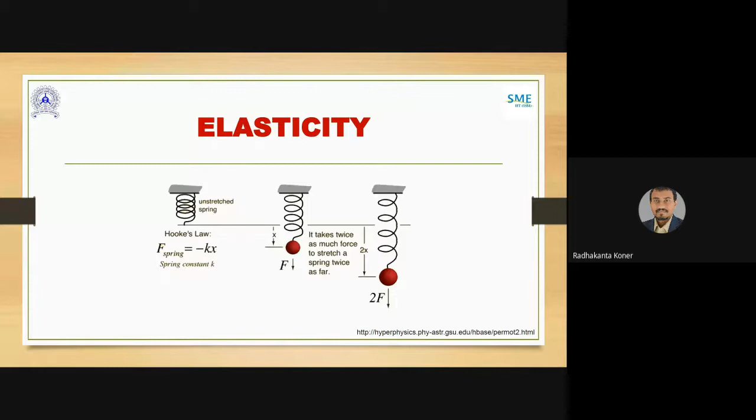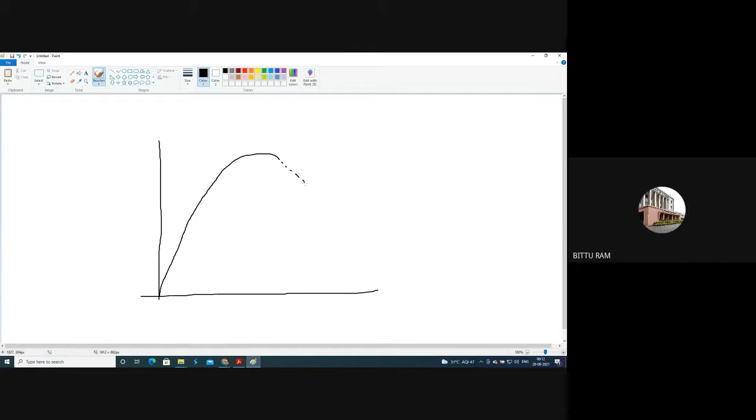Is my pen screen visible? Yes sir. So this is the stress, this is the strain. This is a very famous curve.

Now, people say that up to this portion, the material is increasing. The stress is taken up with an increasing capacity, and there is a gradient, a curved nature, and finally it reaches the yield point. This is the yield point.

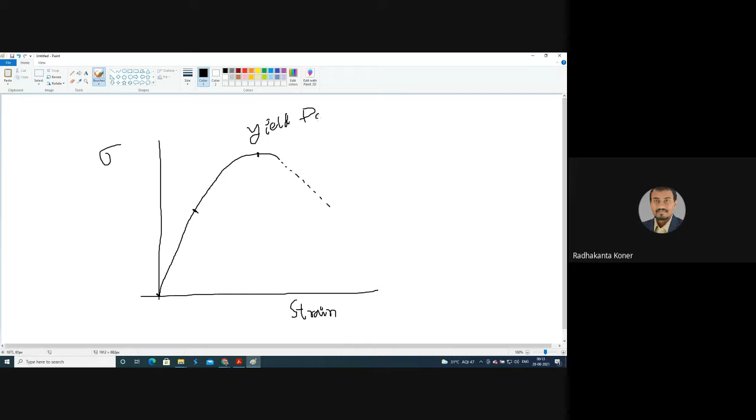Now the interesting thing about this graph is that every mechanical object or material, on average, exhibits this kind of characteristic under an external loading condition. This is now known to all engineers and scientists: any material, when I apply stress, will exhibit this kind of characteristic. After some point of time, after the yielding point, I have marked this dedicated dotted line, which represents a failure.

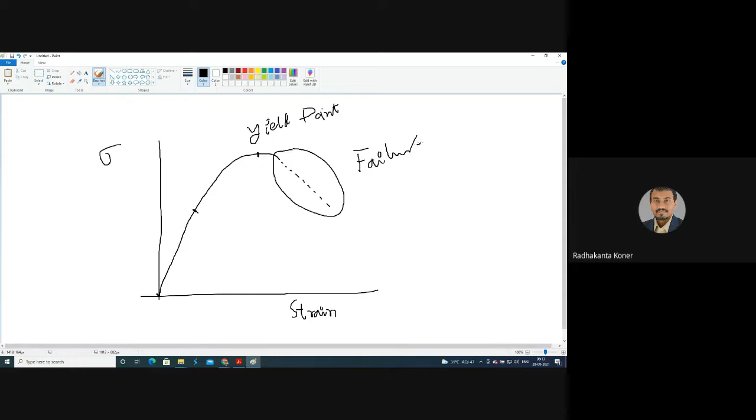So this failure means the material will not revert back to its original position once the load is removed.

Not only that, due to this failure, a lot of energies are released and so on, but that consideration we are not going to consider now.

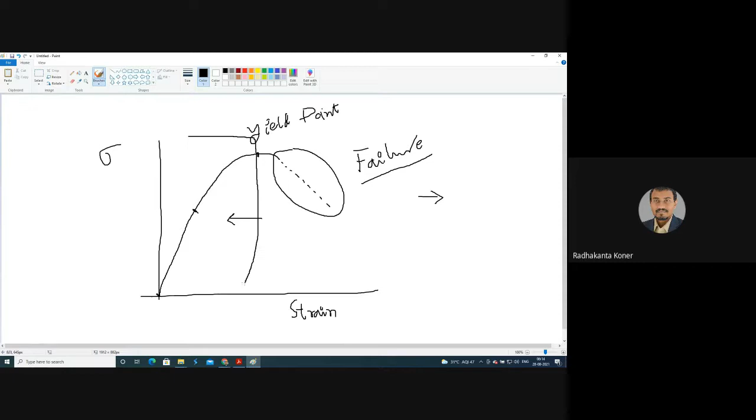As an engineer, I know this much amount of load can be taken by a material. So if I design any kind of structure, maybe a bridge, an embankment, a slope, an underground opening, or a pillar, whatever we design in mining or any geotechnical field, engineers have to respect this particular characteristic curve of that material.

So now one guideline is there for the engineer: if I remain within this range, there is less susceptibility that my structure will collapse.

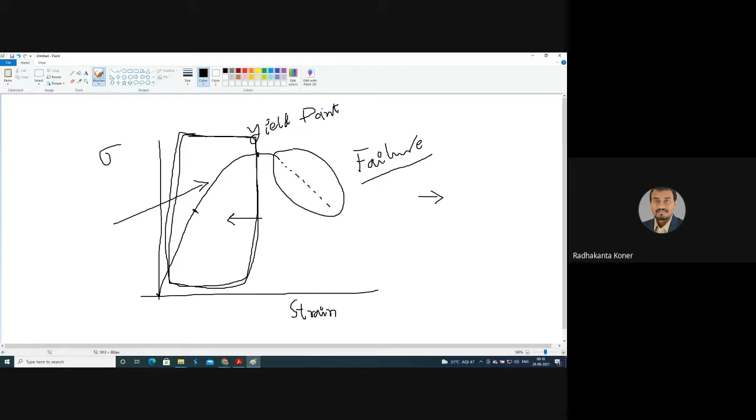So considering and respecting this particular curve, engineers always try to design structures considering the elasticity. So my original discussion was the elasticity, which is a very important part and parcel for our engineering consideration.

Now, one more observation: when you are stretching a spring, it is also a material that has elasticity. When we are stretching a spring, it basically stores potential energy.

There are a lot of physics equations that you already know from cracking the joint entrance examination, so I am not going into those details. But the observation is, now the material is deforming, the spring is being expanded. Expanded means it is deformed, and when it is deformed, in engineering terms we call it strain.

Now, due to the strain, we notice that it is storing elastic potential energy. If this energy is very high, meaning a huge amount of strain occurs, then the dotted line I have shown will manifest, meaning it will break. So if an underground structure like a pillar breaks, it basically means it was trying to store strain energy, but after reaching the yield point, it breaks down.

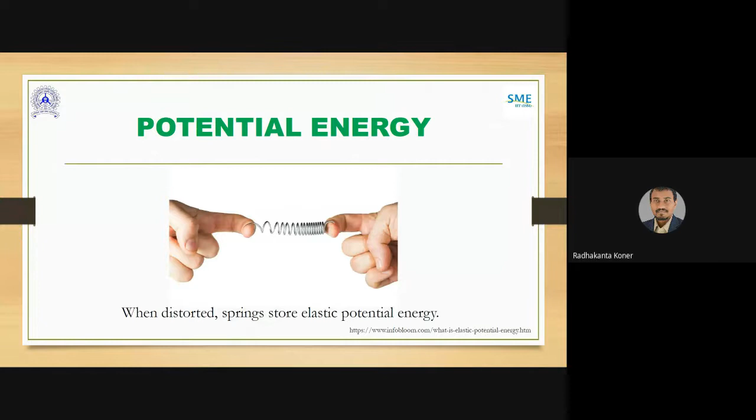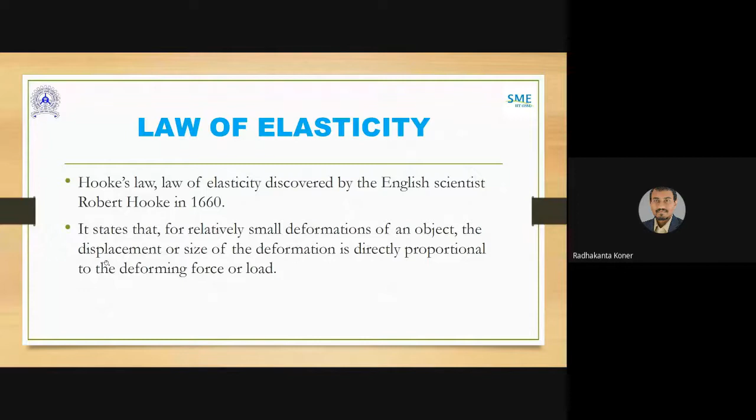So as I already gave the introduction, Hooke is the scientist who discovered this particular law, and he noticed that deformation is directly related to external load, and there is a small deformation that is within the elastic limit. He also noticed that it will return to the original shape once the load is removed. This is a very fundamental contribution to the treasure house of engineering. All engineering structure foundations lie on this principle, which we are always using everywhere, and Hooke also tried to manifest this.

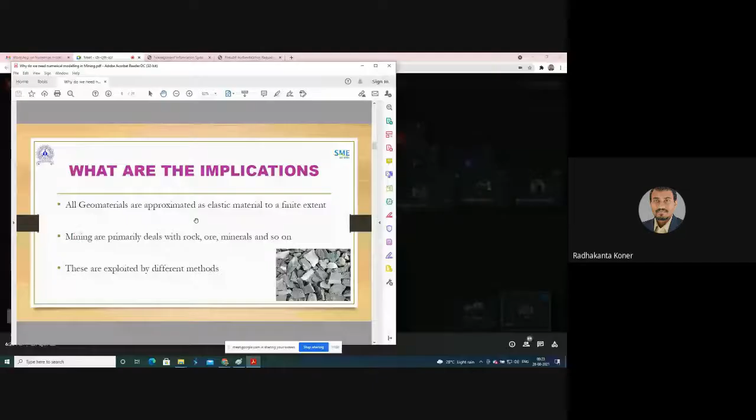Hello Sumit, so how much have I covered? Potential energy, okay, application of elasticity, sir. Application of elasticity, okay. So please remind me time to time if I am disconnected, because nowadays there is a problem in the institute network, okay. This screen is visible? Yes sir, yes sir, yes sir.

So what we have now reached is to do mining. In mining we are doing a lot of operations that I will come to in the next slide, but in principle our engagements are with the rock. We are cutting, we are making some structure, we are carrying those materials, and so many things.

And this rock is basically not homogeneous. We also notice that whatever the homogeneity, inhomogeneity, or isotropy of this rock, it also exhibits elastic property up to a certain limit. And based on that, from engineering geology, we subdivide rock into ductile rock, brittle rock, like that, and many more things you will learn in greater detail when you take the course of rock mechanics.

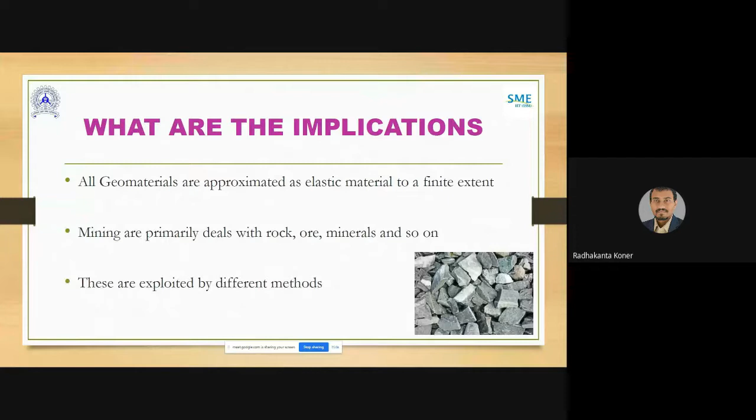So all these mining methods are composed of drilling, blasting, mechanical excavation, transportation of rock, and what I have told you is basically less than what actually is done in the field. There are a lot of things that I am not speaking to you, a lot of things as mining engineers we have to do. So the untold things, unspoken things are lost.

But within this ambit, suppose some of you will really join a blasting company in the coming days. How is the assessment or the performance of the blast explosive being assessed?

Nowadays, throughout the globe, this is done with very well developed, sophisticated software, and based on that performance, people are marketing which kind of explosives should be used in this kind of situation. If it is a situation with a lot of moisture, if there are a lot of cracks, if there are sensitive structures, so many things.

So nowadays, before doing the actual mining, people are widely using numerical methods to simulate before actually doing it in the field. Even for the mechanical excavator, how it is to be designed, what kind of mechanical excavator is to be taken to excavate these kinds of materials, we actually simulate first. And to simulate that, you need some kind of approximation technique, and that approximation technique is the numerical method. So there are so many things.

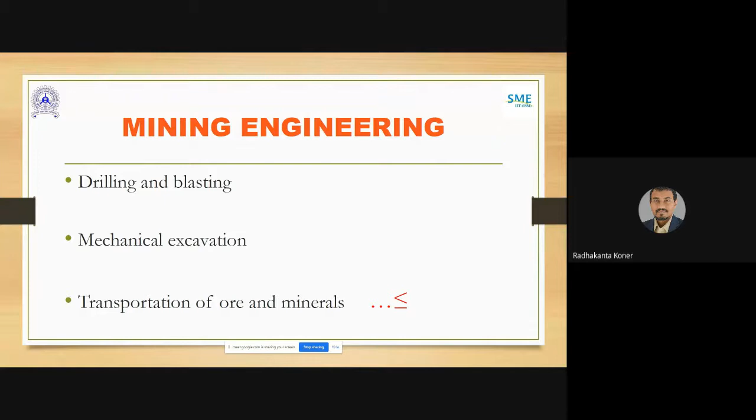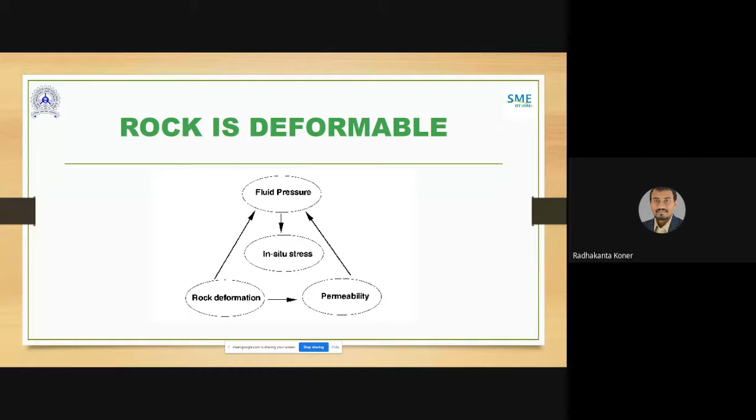Fluid pressure is a very dangerous thing, because in an underground mine, you do not know the exact source of the water table. So suddenly, if you trigger some amount of blast in that situation, there will be inundation, a problem we know from experience in earlier times. So these are complex things, but rock deformation, how it is played through fluid pressure to permeability, all are interrelated.

Now coming to a solution. All mining engineers, when starting to read rock mechanics, are exposed to this equation. What does this equation mean? It tells us that if I am driving an underground tunnel, or in engineering sense, a circular opening underground, and I am assuming that in and around my rock is homogeneous and isotropic, and evenly layered, then for that consideration, sigma r, sigma theta, and tau r-theta can be manipulated using this formula very well.

There is no question about the authenticity and accuracy of this equation. It is a very good answer to the fitting problem. Now, you cannot drive considering homogeneity in and around your environment of a tunnel. You cannot.

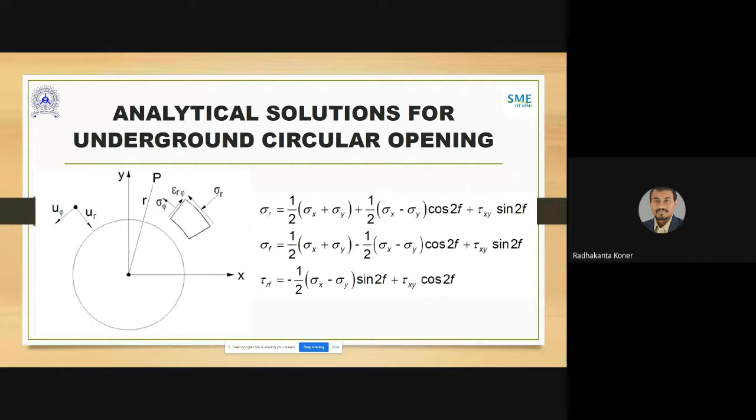People also tried this fringe method. This is a homogeneous sheet, a perfect kind of sheet, earlier there was no perfect sheet. It is a homogeneous transparent sheet, and people tried to give a load from both directions, and we are passing a light through it, trying to take an X-ray of that particular situation, to see how much the intensity of different stress is developed in and around the underground tunnel.

It is not an underground tunnel actually, it is a sheet. On both sides I am giving a load, and how much the fringes are being formed has been nicely shown. This is also meaningful for a homogeneous formation, but our problems are not homogeneous.

So that is why we are trying to find an alternative solution, and that started in the 1960s. Already the numerical methods are more or less 70 years old, and more than that, because the finite difference method was proposed originally more than 200 years ago.

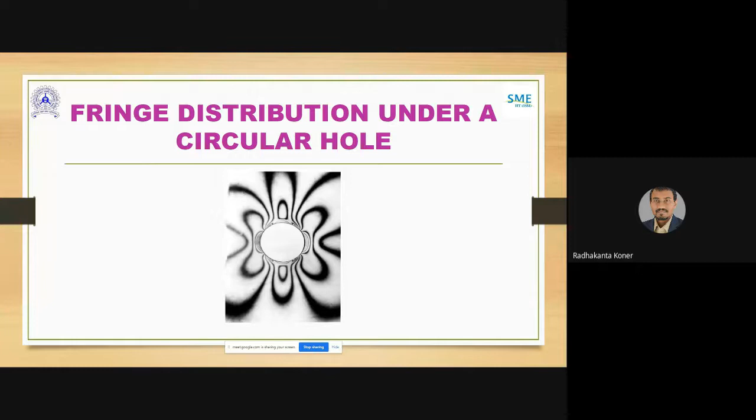The FEM basically started in the 1960s. The FDM, we will just try to initiate the discussion, was originally proposed for solving complex partial differential equations. Later on it has been used in the geomechanical field, and there are a lot of softwares associated with that.

Now coming to a classical rock mechanics problem, formulated by Professor Jing in his paper in the International Journal of Rock Mechanics in 2003. He showed that for a rock mechanics objective there are Method A, Method B, Method C, and Method D available with us. All these methods involve site investigation, some amount of mapping, and after following these methods we have to do some design, based on forward analysis as well as back analysis, and finally construct the structure we are dealing with.

He proposed these four methods are interrelated to each other, but Method A occupies one column, Method B occupies another column, Method C another column, and so on and so forth.

From Method A, it's basically based on previous experience. Experience is a very important matter, and that is why experienced engineers have a lot of value in the field. Following A, using pre-existing standards, there are different standard classifications, different thumb rules in use in mining, and maybe some case studies you are working based on. But it is good to some extent only; it may not be exactly replicable in another site due to inhomogeneity, anisotropy, complexity, heterogeneity, and so on. So Method A is gone, it is no more useful.

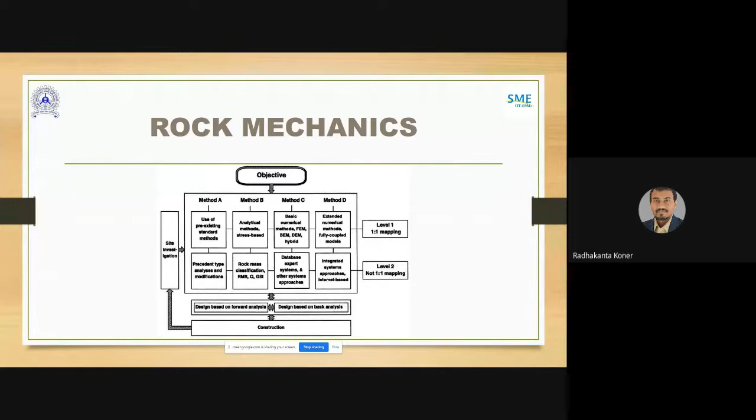That would be very attractive to the engineers. In that sense, it basically encompasses everything, because you are collecting data on a real time, simulating the model in real time, and coming out with a predicted result - what should be the next. You are already getting the data and comparing how much it is matching. If it is not matching in a quite right way, you will revert back to the original modeling and fine tune your parameters so that your prediction and the coming out result will match in exact nature.

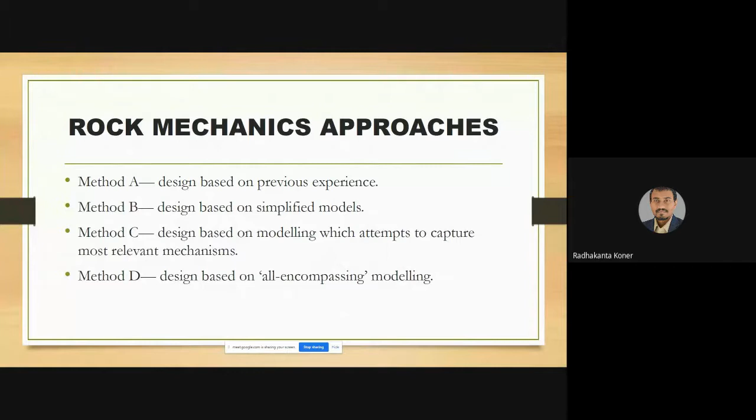So in that way, method D is a very good one, and that will remain good in the coming days also. I am very much thankful to Professor Jing, who proposed that method D is basically the all-encompassing one. He was right in that assessment, because at that time there was no IoT development, no development that real-time monitoring is possible, but he predicted well with his knowledge of rock mechanics. So our approach would be: in any engineering structure, method C is good and method D would be better.

Okay, so now if I summarize my discussion - why we need numerical model or numerical method. I am trying to summarize a few parameters in my own words. One is the limitations of the analytical solution. Analytical solutions have a limit. They had a golden age 200 years back - it's good, but now analytical solutions will not be able to give a good solution for our engineering problems. So it's gone. This is one point pushing us in the direction of numerical modeling.

Better modeling - in numerical models, we are basically getting an approximate solution, and that approximate solution has been revisited, tested, and verified too many times, actually matching the real world scenario. So an exact solution is not necessary. Exact solution is given by the analytical solution, but this approximate solution is very good, workable. Not only that, all these manufacturing industries, car manufacturing industries, are heavily relying on this particular modeling because of this approximation solution.

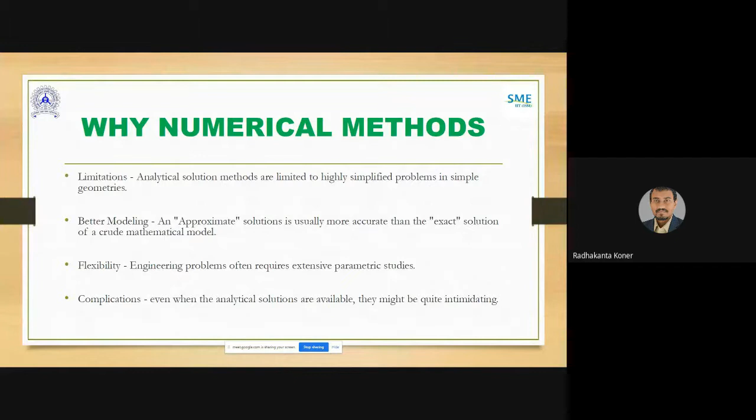But there are big parts that I will now introduce before going to the continuum based model. Remember...

People nowadays often think, okay, I have a numerical model, give us a problem, I will give a solution. But what has been found out? These computers are black boxes - any input you give, if there is no error, some output will come. Whether that output is reasonably within limit, whether it approximates the real time or real environment, you don't know, until you know your solution is quite matching with the real one. For that you need to learn a lot about the theory, about the basics.

It is my request to everybody that, because nowadays you all have laptops, computers, and somehow you have managed to get some software toolbox in your possession - that is not all. You have to learn on which theory these numerical models work, and based on that you are modeling something. And what should be the outcome of that model, beforehand you should know. Only after evaluating your model output can you be pretty sure that your model is correct. So that knowledge is necessary, and that is very much lacking in the present generation.

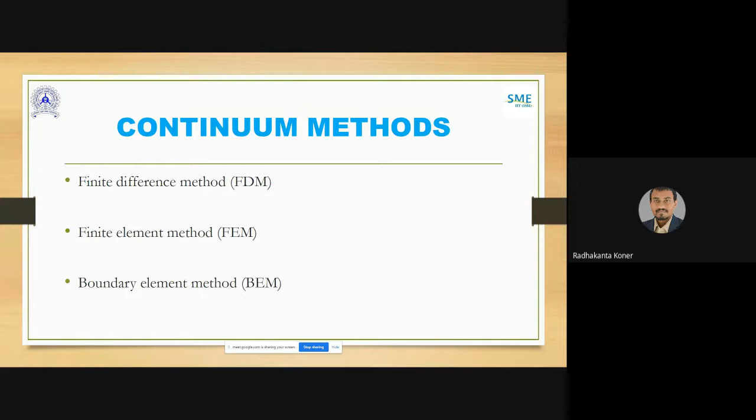So now, before coming into the details of the finite difference method, what I was trying to say is that in any numerical model, all kinds of numerical models, a few things are very rudimentary and you need to know very well. One is the boundary condition.

Boundary condition means - suppose I am sitting here on a chair in front of my computer. So myself, Radhakanta Koner, am an object, suppose, and I have some mass, and with that mass, I am made of biological cells, and there are lots of bones within my body. Suppose somebody wants to do a numerical modeling where I give a thrust force to Radhakanta Koner - so how much deformation will be on the object Radhakanta Koner?

What do you have to consider? You have to consider that I am sitting in the chair, which means I cannot go below this chair because the chair is an elastic, very hard body - with that kind of thrust, the chair is not going to dislodge, so it will remain in place. So I am sitting here, and this sitting portion of the chair basically bounds my deformation in the bottom direction - so my deformation in the bottom direction is fixed. Similarly, my back up to the shoulder is protected by the guard of the chair, so displacement of my body in that direction is also blocked.

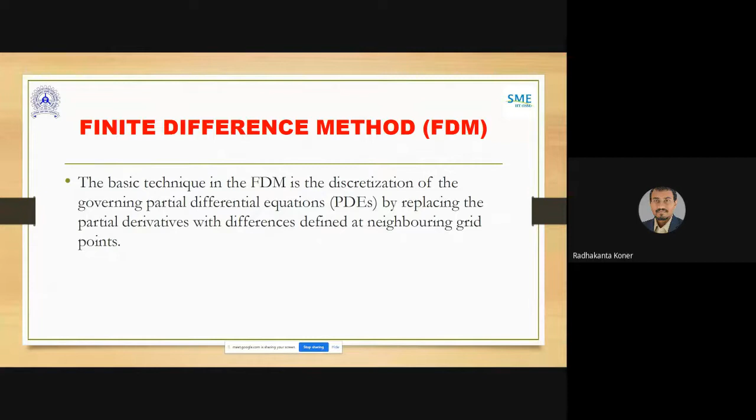So this can be represented like this. Suppose a profile is there and you know the function of the object you are considering, distributed on a finite profile. Now we are trying to discretize that function profile on a path into a finite number of mesh, a finite number of grid. So we try to solve at the x0 point, at x1 point, at x2 point, and so on.

You may have a question that it may not be so smooth a curve — that's correct. It may not be this kind of curve. Maybe after x1 there is some other function possible. So that much complexity can be included in this function, because if I am able to discretize the method, my half work is done. The rest you have to compute using the finite partial differential equation.

There are many methods: explicit method, implicit method, Crank-Nicolson method, so many methods. Basically one approach is forward computation at tn time, another is backward at tn plus 1 time, but all rely on the central difference, like what we learned in class 11-12, how differentiation comes from the limit. There's a nice expression, f(x+h) minus f(x) divided by h, with h tending to 0. That central difference expression is useful everywhere in this finite difference scheme.

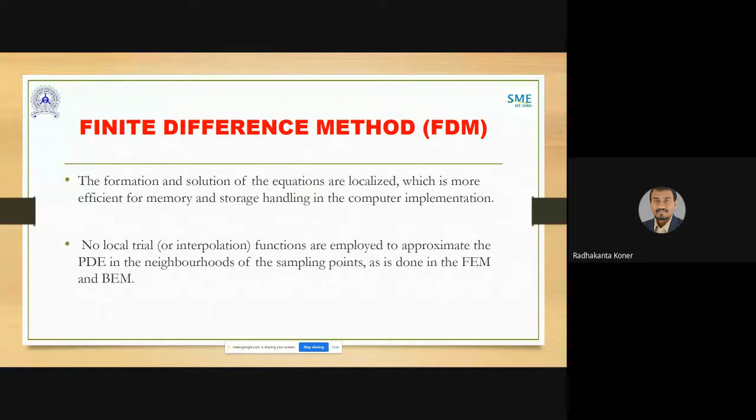But there are problems with the interpolation or near approximation of the problem, because if there is some crack, there is a continuity break. If there is some amount of inhomogeneity within that continuity, there is a break — that particular thing, within this regular grid, you cannot consider with this kind of computational capability.

That is why, for a large strain, homogeneous formation, FDM will work very well. But if there are a lot of stratified deposits with large deformation, it will be very difficult for FLAC to handle that, because computationally it becomes very difficult.

FLAC, or all open-source finite difference methods, have a limitation in considering material heterogeneity in general. So for large deformation in a normal mining structure, FLAC is very good and computationally efficient. But for a large heterogeneous structure composed of fractures and complex boundary conditions, it is very difficult to solve using the finite difference method. So what is the solution? The solution is basically to turn to the finite element method.

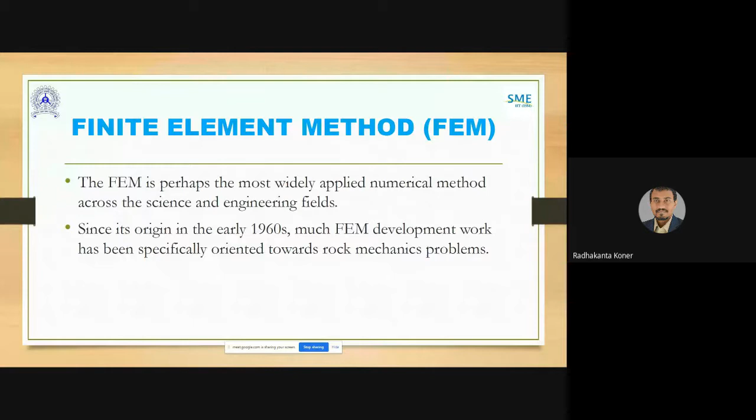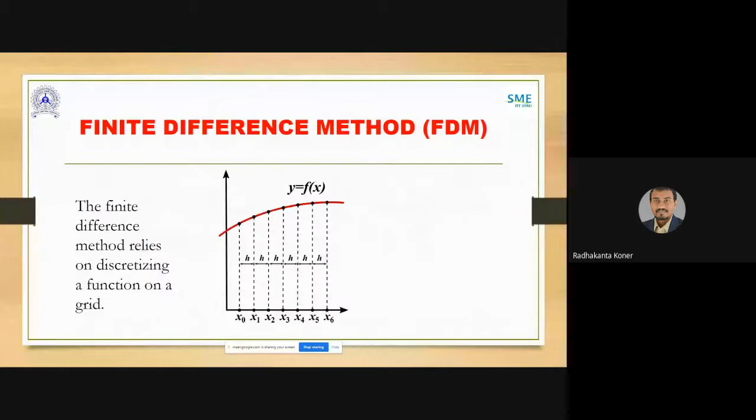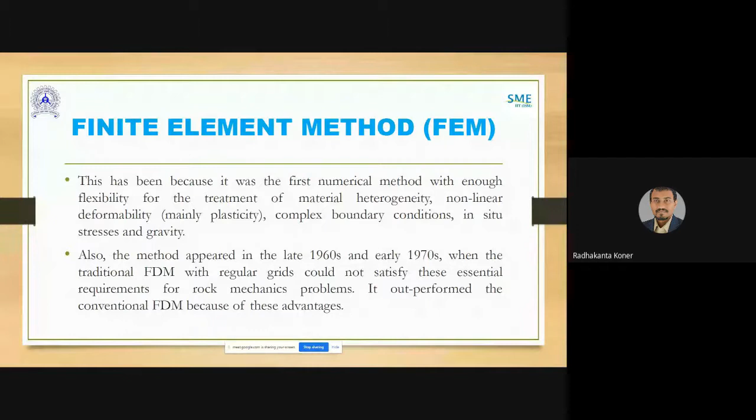Now in this finite element method, what we do - it is not been mentioned, but I will tell you - here, instead of a local state solution, it basically comes with a large stiffness matrix. So for storing that large stiffness matrix, you need very good computational power. Once the stiffness matrix is developed, your half work is done. You can incorporate so many things and your solution is done.

That K earlier, in the spring example, you remember that was a constant, spring constant. Our stiffness matrix is a kind of that matrix, the K matrix. We are trying to develop, trying to come out with a solution, with a repeated solution, in this approach. And that is basically the strongest point of the finite element method.

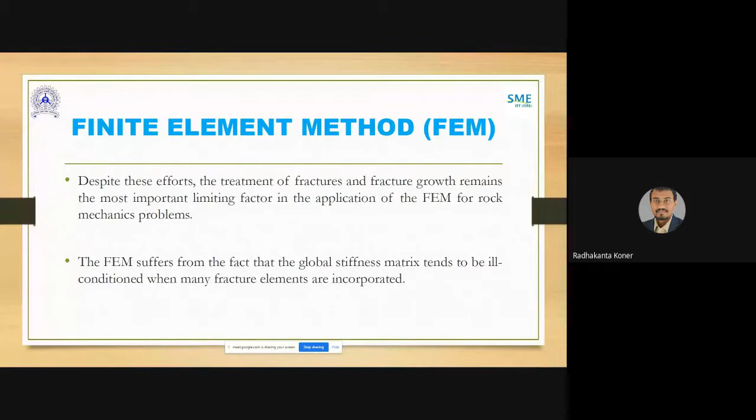People have shown that for a heterogeneous structure, a large complex structure, generating the mesh is a huge task, because there are a lot of errors shown by different software. So later, maybe around 2010 onward, there was development of meshless methods, and these are also very much in use nowadays.

For sensitive structures, FEM is basically approaching in a very robust way to consider all the complexity we are now facing, to model a real geotechnical structure or any structure matter useful in day-to-day life. So in that sense, I can rate FEM as the number one numerical method for dealing with any solid object.

Remember, I have mentioned the solid object - because in my lecture today, I have not considered gaseous material or fluid material and their modeling for engineering problems. We are only considering solid body, rigid body, elastic body.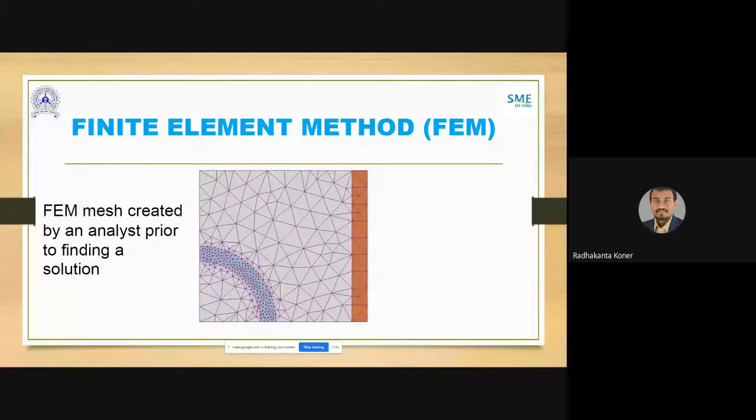So these meshless methods nowadays are in use throughout the globe, and people have come out with a solution to deal with this complex problem of generating a mesh for a large 3D structure. So I think the advancement will be more in the coming days, and there are a lot of things going on that you can use.

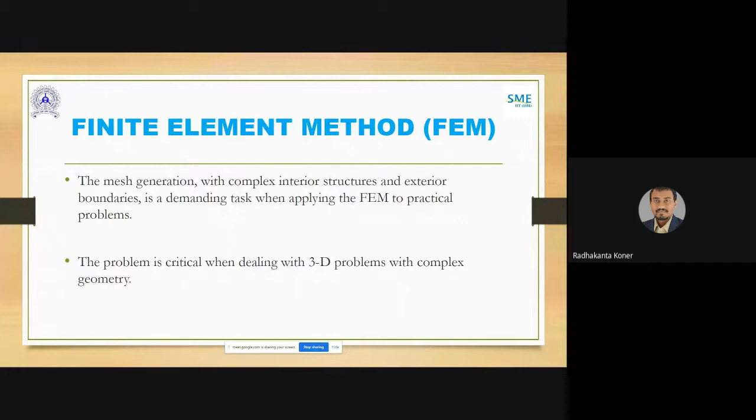ANSYS and Abaqus are very potential candidates in this particular domain for considering the geomechanical behavior of rock, soil, foundation, and interaction of water with soil, interaction of pore water pressure of rock, and crack, discontinuity, joint, fold, like that. So this is very good in that.

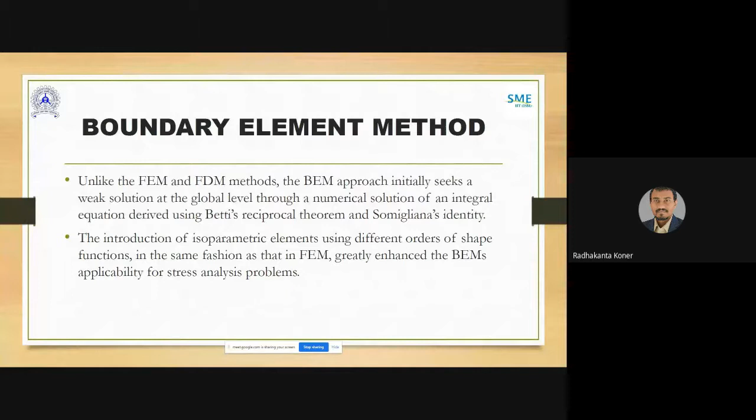I will not discuss in detail, or give much time to the boundary element method, because nowadays it is outdated. Earlier it was used only for mining, excavation, pillar design, like that, and it is no more in use. So we will not discuss it.

Now, apart from finite element method, one of the strongest candidates that I think will sustain in the long run in rock mechanics is basically the distinct element method or discrete element method. In the 1990s - it is only 30 years old - the journey of DEM starts with the Peter Cundall model. Peter Cundall was a rock mechanics engineer. He proposed this method, and from that, there are a lot of companies nowadays dealing with this kind of computational technique, and a lot of toolboxes have already come out that people are using.

The principal focus of this numerical modeling: suppose there is a sand pile, a stack of sand. Now with a ball pen, with a very fine needle, you are monitoring the sand pile. Touch a sand particle, or push some amount of tipping force on a sand particle.

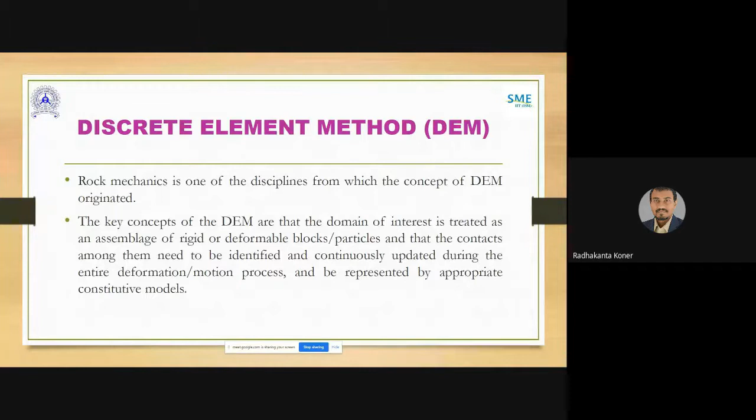But as a rock block, it is actually deformable. So there are limitations in simulating the real behavior of a rock assemblage using a toolbox that considers only the discreteness of the mixture. These are the limitations, and people have tried to sort them out over the years, coming up with new models.

People have tried and come up with a solution, so nowadays the problem of deformability is being solved. When this rock or rock particle interacts with hydraulic or pore water pressure, or any fluid, it forms a membrane kind of structure, and that membrane is continuous and has elastic behavior.

So now we are confident that we can simulate the behavior of an assemblage of rock with fluid interaction, because we have a finite element solution and a DEM solution, and we can predict the particle's behavior. My conclusion for this lecture — though the full conclusion comes later — is that the discrete element method is a very potential candidate in the coming days to interpolate or predict the behavior of a complex rock structure.

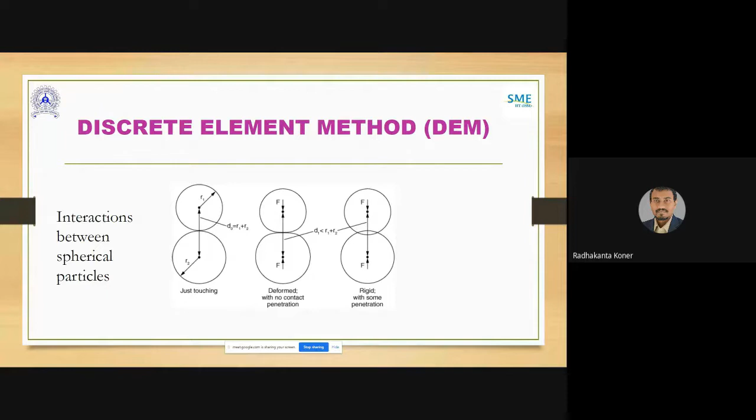There is an important consideration that often comes up while solving a DEM solution: we have to consider an interaction coefficient, which is the normal stiffness and tangential stiffness, or another terminology used in different software. You may ask how to estimate Kn and Kt — it is very difficult, and differs somewhere across other software and toolboxes.

But principally, this is the theoretical basis and foundation of DEM; based on that, it is working. So people are also trying to develop a laboratory scale model, from which they can estimate Kn and Kt.

If I remember correctly, from around 2010 onwards, Imperial College of London, along with a university in Germany, collaborated to develop this kind of lab, trying to simulate conditions not observed in a real world scenario — specifically the interaction between two particles. From that lab they tried to derive values of Kn and Kt.

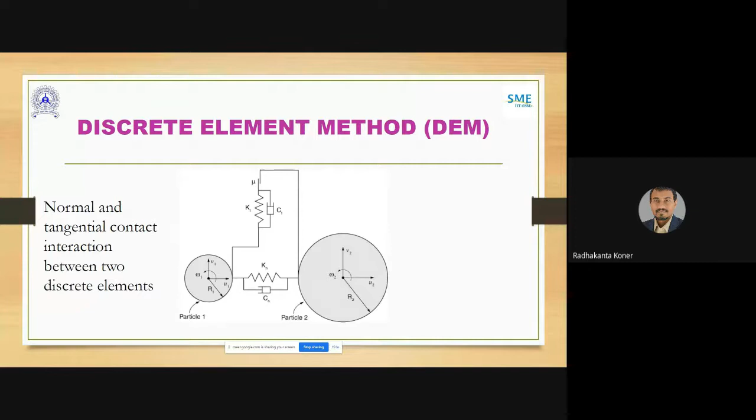It will outdate, particularly in geomechanical structures, the finite element simulation, and it has a lot of prospect. So if I summarize my lecture, what I tried to tell you in between my lecture.

If you get a toolbox, you give some input, you get some output, and that will not suffice your growth of knowledge. Also, that will not suffice the real need that you are doing. A thorough understanding of the numerical method is very essential.

Nowadays, suppose— today I was talking with Prithvi, your senior. He just passed this year, 2021. He was telling me, sir, we got a unique opportunity that as a junior batch of mining engineers, we will start a mine itself, because the land acquisition was not there. So starting from land acquisition to the initial production, maybe down the line 5 years from now, 2021, production will start in 2026 maybe.

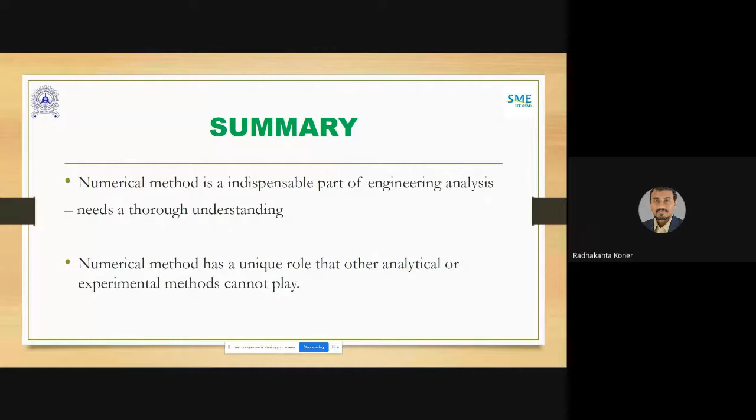It should not be treated as garbage in, garbage out. We must find out the answer to our problem, not think that the software alone is the answer. So remember, try to couple the experience of the geologist and the engineer with your output, so that your output is valuable.

So in that sense, to start with, you can do some amount of laboratory modeling. That laboratory is available with you. Suppose you can do some testing that you are doing in a rock mechanics lab—take that note in your notebook, and exactly replicate that in your numerical model.

That will be a very good way to start with the numerical model, because you know the result. And the same thing, you try to summarize, interpolate, extrapolate, and plot. Those are the behaviors, and you get exactly the result. That will give you the confidence that you are on the tentatively right side, that your modeling is actually giving the result.

In that way, my suggestion will be, do some experiment—maybe in your home, if you are not allowed to come into the campus. Do the experiment at home, get the result, and exactly reproduce that result in the numerical simulation, because that result is with you.